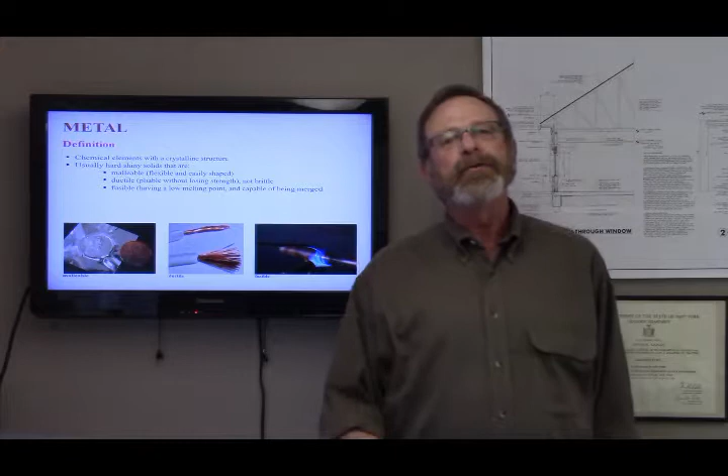Metals of various types occur in nature and must be mined and refined to extract the elements and separate them from their impurities. Metals play an important and prominent role in almost every component of our many building projects by virtue of the fact that metals conduct heat and electricity well.

They can be formed into many critical components for uses such as structural members, framing members, heating and air conditioning systems, mechanical ties, special components, electrical components, tools and equipment, windows and doors, accessories, furniture, specialized furnishings and equipment, wall and ceiling finishes, signage, building systems, fireplaces, and skylight components.

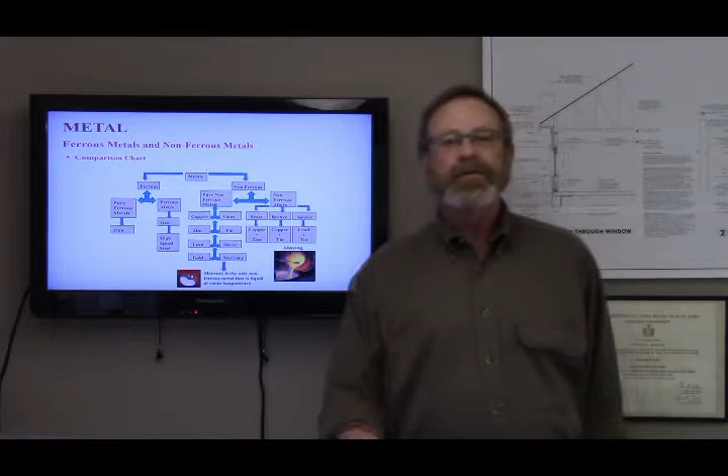Metals fall broadly under the categories of ferrous metals, which contain iron, and non-ferrous metals. Notice that in this chart there is a third category of metal, those metals which are alloys of ferrous and non-ferrous metals. An alloy is a metal made up of two or more materials to improve a metal's properties. One of those materials has to be a metal.

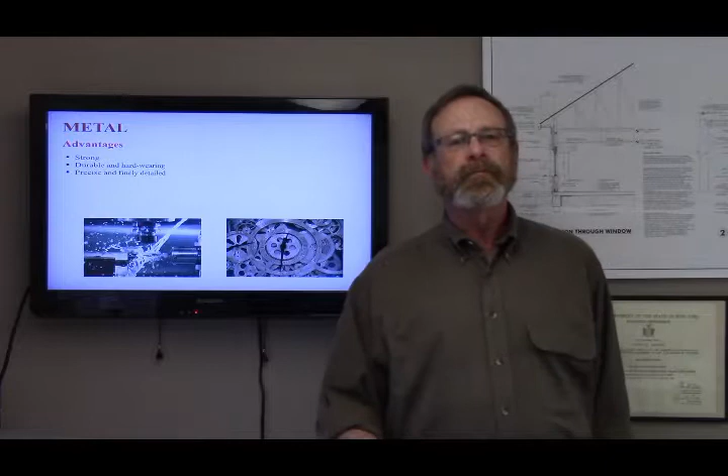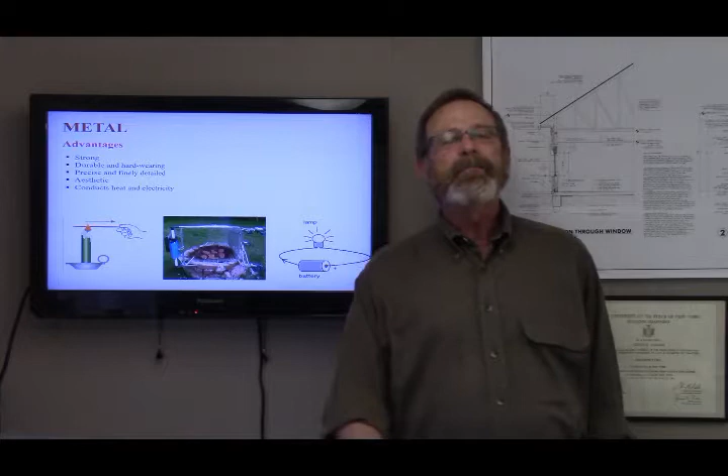Ferrous metals are generally stronger than non-ferrous metals, but both types are durable, can be finely crafted, are appropriate for aesthetic purposes, and can be useful components of a building's mechanical, electrical, and plumbing systems by virtue of the fact that metals are malleable and ductile.

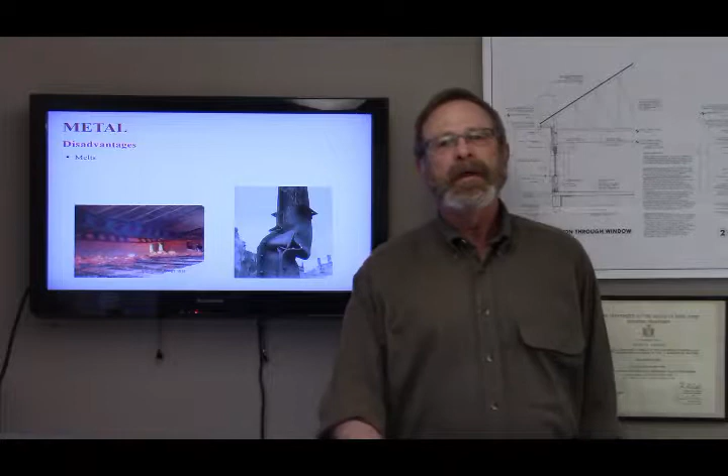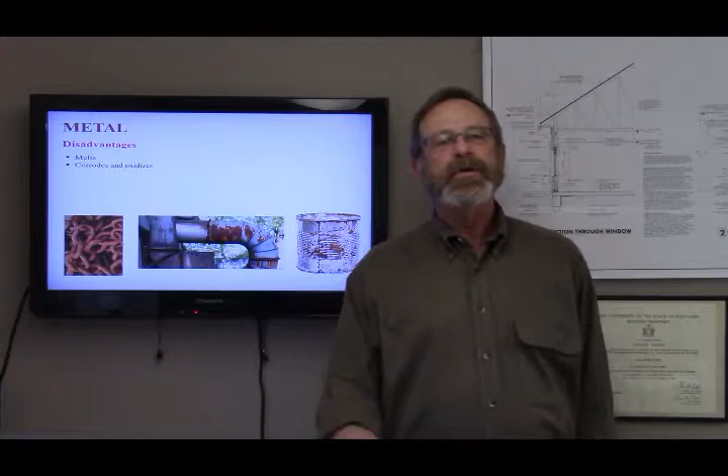Unfortunately, when metals exceed their heat limit, they start to deform and melt. Also, with exposure to wet conditions, metals rust, though ferrous metals more so than non-ferrous metals. Non-ferrous metals have their own thin oxide layer which protects them from susceptibility to corrosion.

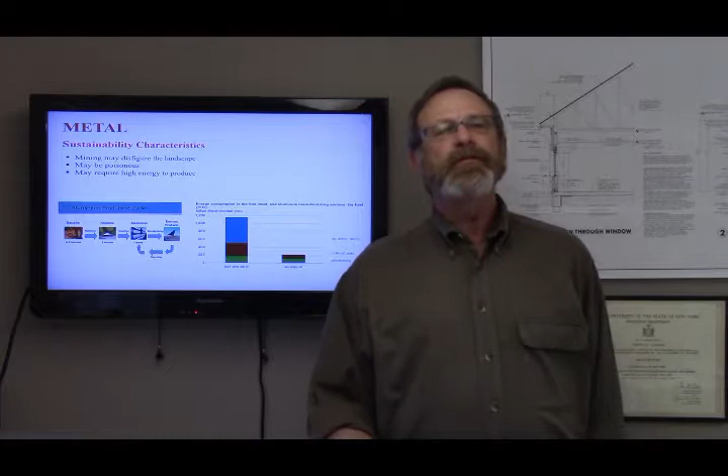Metals can be expensive because of their scarcity, difficulty to mine, and the cost of labor to manufacture, produce, and install. Several environmental issues associated with mining metals are strip mining, toxicity or poisoning, and carbon emission footprints, which one could consider offset by the high recycling rate of metals.

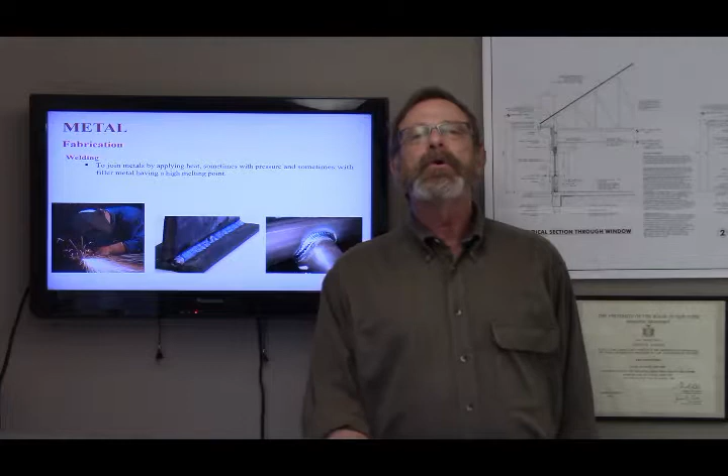There are a number of ways in which fabricators can join together metal components. This slide shows a method called welding. Welding is high temperature fusing created by a gas flame or electric arc which melts two metals. The point of connection of the two flow together with additional molten metal from a welding rod. Welded connections are as strong as the metals they join and can be used for structural work.

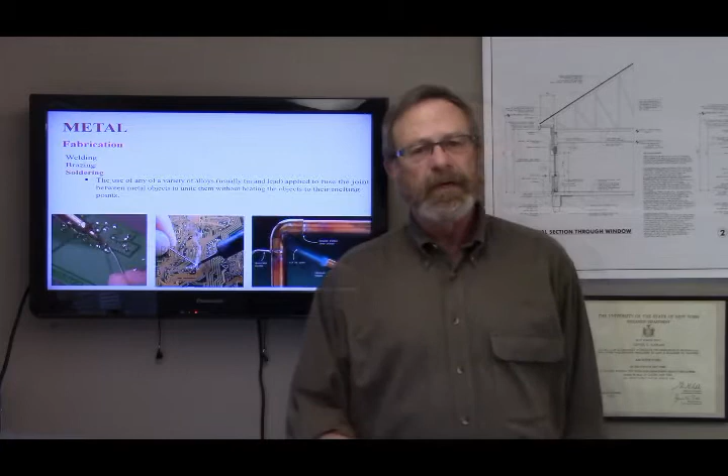Brazing is a lower temperature process. The two metals are not themselves melted, but are joined with the introduction of a third metal with a lower melting point. This forms a connection too weak for structural purposes, but is sufficient for plumbing pipes and roofing. Brazing uses brass or bronze as the third material, while soldering uses a lead-tin alloy.

Metals can also be joined by mechanical means, whereby the metals are drilled or punched with holes, through which are inserted rivets, or bolts, or screws. Metals can also be joined by bending them together, such as with a standing seam roof.

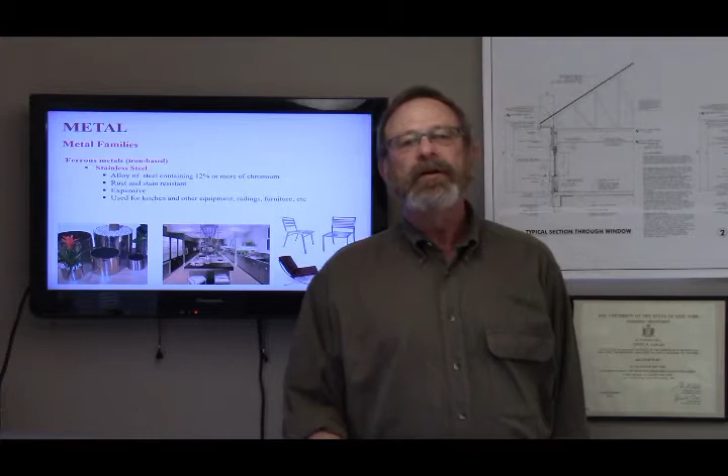Steel refers to iron formulated with low amounts of carbon to increase strength and is used for structural components, framing members, and structural and mechanical fasteners. When dipped into zinc, steel becomes encapsulated with a protective coating which inhibits rust and is known as galvanized steel. Stainless steel is produced by alloying steel with other metals, primarily chromium or nickel, for superior corrosion resistance, which accounts for its many uses as flashing, fasteners, hardware, and a wide range of finished materials.

Used as an alloy with other metals, copper is ductile and corrosion resistant. It has high thermal and electrical conductivity and can be cast, drawn, extruded, or rolled, making it useful for electrical wiring, flashing, roofing, and piping. An alloy of copper and tin, bronze resists corrosion and is used for weather stripping, exterior building cladding, hardware, and ornamental work.

Architectural bronze is used mostly for interior finishes, and as you can see from this and the next slide, by its composition, architectural bronze is actually a brass. Brass can be polished to a high luster. Brass does tarnish, and does require constant maintenance. So we're going to look in the next few slides to learn about a sampling of other members of the metal family which interior designers frequently encounter.

Perhaps you're familiar with pot metals, commonly known as zinc, tin, lead, or pewter. You're probably familiar with gold and gold leaf applications. Silver, or silver leaf. Aluminum. Titanium has been popular for architectural facades in the last 2 decades. Chrome.

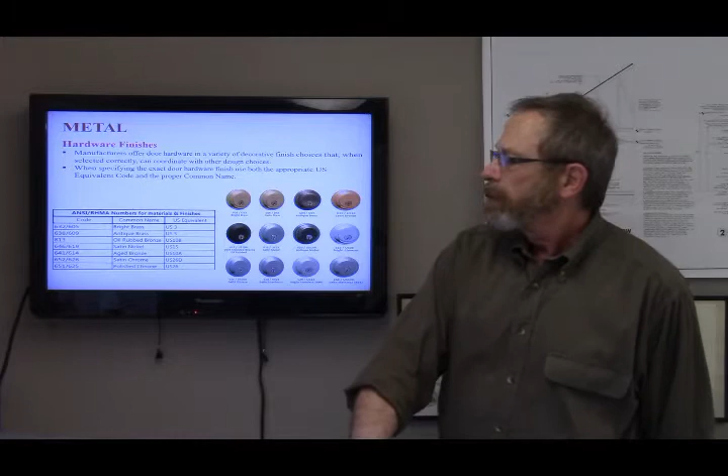Metal finishes are specified using jargon developed by the Builders Hardware Manufacturers Association and the American National Standards Institute, ANSI. Many experienced interior designers can easily associate the U.S. equivalent finish terminology in this slide with the finish's actual and more common name. Why not learn a few?

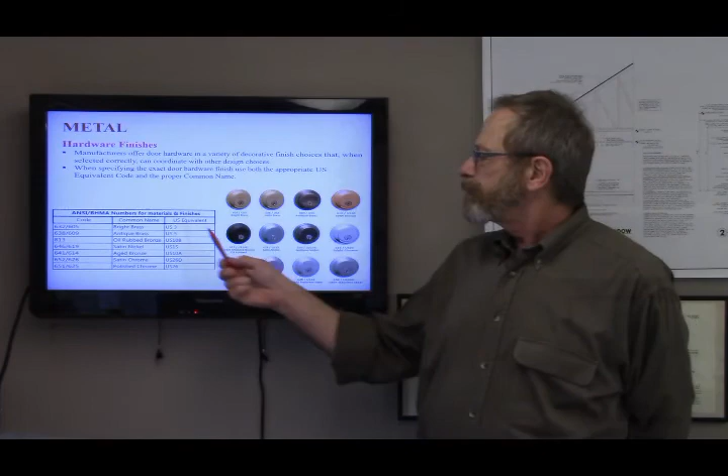You see here that by common nomenclature, for instance, satin brass has a designation common in the U.S. as US4. So we may talk to our client about satin brass, but when we specify the material finish that we want from our hardware supplier, we are going to call it US4. Similarly, bright chrome is US26. Get familiar with this chart and understand that there are two ways to specify a metal finish: one is by its US equivalent number or by its more common proper name.